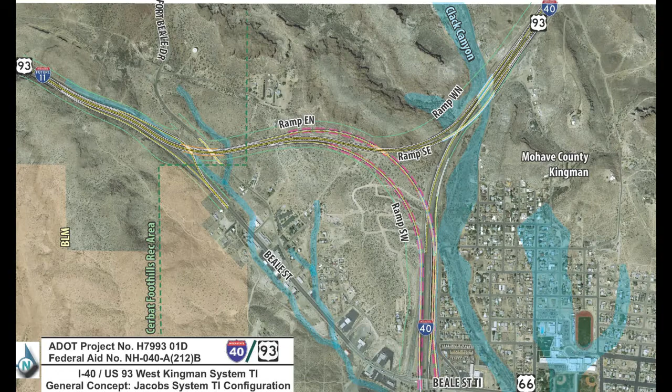The one thing that wasn't shown in the original design concept report is that these improvements weren't originally scheduled to go as far to the north as we are currently showing them. On the screen in front of you, it might be a little bit light, but we were initially going to basically stop the improvements north of Clack Canyon, actually just north of the White Cliffs bridges, and tie back into existing I-40.

We're now including our improvements to go all the way up to Stockton Hill. If you're familiar with how today it's 2 lanes in each direction from Stockton Hill to Beale Street, it'll be 3 lanes as we connect to the improvements, the ramps, and then going up to Stockton Hill. It'll be an auxiliary lane, so it'll drop as we approach the east side of Stockton Hill and merge right in with the off-ramp or the on-ramp. So as you get on and off those 2 respective ramps, it'll appear like you're just transitioning right onto the freeway as opposed to merging and getting into the other lanes.

So our improvements have extended to the north a little bit. If we didn't build those auxiliary lanes, we couldn't get the facility to function in the future traffic demands. As the area continues to grow, the volume of traffic would exceed the capacity of the interchange. So those are some of the changes that we were having to make. On the agenda, I put some issues that we're right now looking at in terms of where the design is being focused, what are some of the issues that we're considering with the improvements that are being done. The first one is the I-40 westbound and eastbound improvements. Well, talked about Stockton Hill.

The last point on there says the interchange capacity will reach a level of service D. In traffic speak, for those of you that don't do level of service, it just tries to identify how busy the roadway system will be. Level of service D is still an acceptable solution for how many cars are on it, but it's going to be comfortably busy. I guess that's the best way I would describe it. Not overwhelmed, but certainly within its capacity.

The next item that we show on the issues list is stockpile materials and earthwork balance. One of the things that we're going to be doing on this particular project is mining and giving the opportunity to use some of the materials that we're cutting through on the mountains as aggregate in the project. ADOT has done some exploration, and the very first hill that is immediately to the southwest of Clack Canyon is particularly hard rock, and that material will work for our aggregates. So we're actually going to be saving some money by processing that material and that cut from the rest of our project.

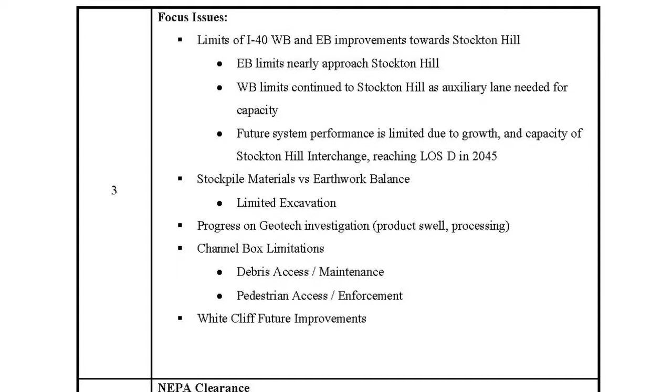Oops, I guess I got my slides out of order. Well, let me just change one thing back. We talked about the material source. I didn't show a slide for it.

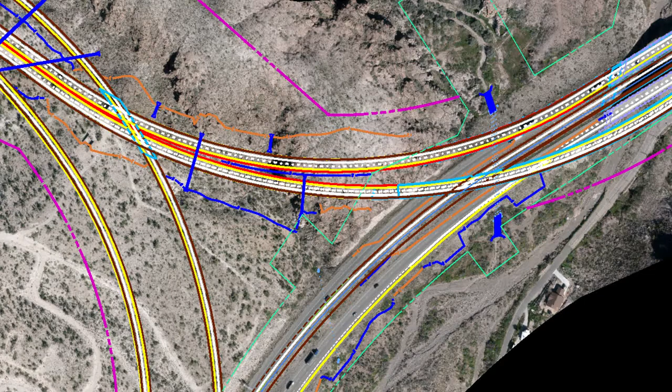Up on the screen, we are showing you a picture of the hill that is immediately to the southwest of Clack Canyon. That's the material I was just talking about, where we're trying to mine some of that material. We had a three-dimensional picture that kind of just shows how we're cutting into the sides of the slope. So if you can kind of use your 3D hat. Everyone right now is used to seeing fantastic animations.

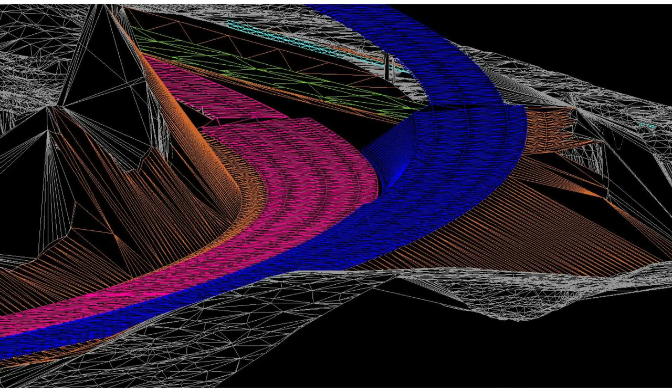This is not a fantastic animation, but in engineering speak, it shows how we're going to cut into the hill and how we're going to use some of that material. The good news for us is it's not going to be a huge, large face like some of the other cuts on I-40. We're looking in the 40 to 50 foot range in terms of the cuts, and it blends in well, fitting in with the two alignments that we have.

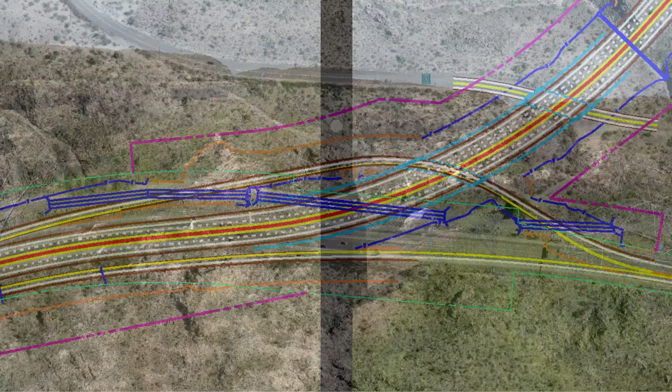So we have some erosion to take care of as far as our improvements are concerned. Where we're building the connection between US 93 and these improvements happens to coincide with where some of this erosion is occurring. So we're in the vicinity of fixing it. And so what we had proposed to build is, as we do our improvements over the drainage channel, our intent was to put in some large box culverts and simply convey the drainage under the roadway.

The slide that's on the screen right now shows the interchange improvements; the dark blue lines are showing some parallel features. That's a couple of series of box culverts that are located in the channel itself. No big difference from any other highway project. They all include box culverts and they all have drainage that has to cross the roadway. The only reason we're bringing this up on this particular project as a question is we're really close to Kingman. We're really close to potential pedestrians.

And anytime we build a shade structure, that's what some people consider a box culvert to be, then this might be a potential place of respite from the heat and the winds that occasionally occur here in Kingman. I don't mean to make light of the fact that there could be a problem with conflicts as to how we build this. However, we have to convey the drainage in that channel and get through the interchange. And so right now, the most routine and the most direct approach is to build the box culvert.

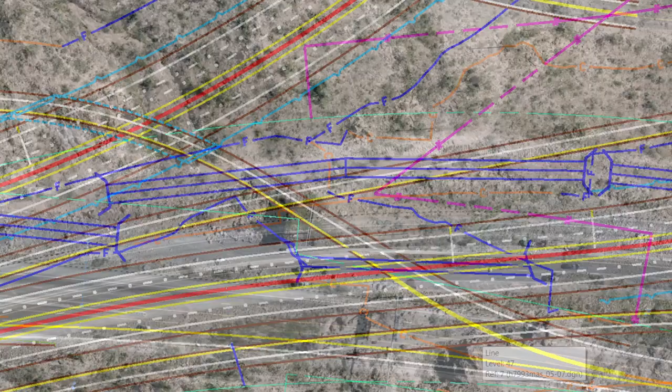One of the ideas that was brought up at downtown, instead of putting in the boxes, why don't we consider relocating the entire channel and building it, if you will, to the north of the ramp in between Fort Beale Road and our system ramp. The only problem with doing something like that is there's an awful lot of rock and an awful lot of mountain in between there, and that's why the channel is where it is today. But that is something that we will look at doing just to see what the cost comparisons are from trying to find another way to build that channel.

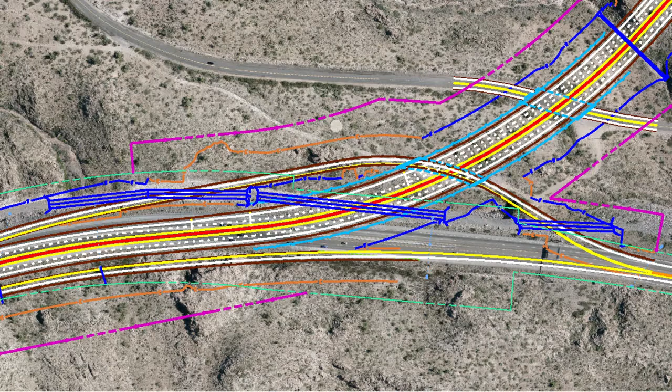If we were in a situation where that material was great rock and we could use it for our material sources, that would be an added benefit. Unfortunately, our understanding is these are volcanic tuffs, and while it looks like rock, it acts like rock, it doesn't hold up like rock for our material sources, so we can't use it in the roadway other than just embankment. So those are some challenges that we were experiencing associated with that.

When we came during the field review, also earlier in February, March, we're talking about our improvements are now being extended almost all the way up to Stockton Hill. And so we're crossing over where the White Cliff bridges are today. So here's a picture of the two bridges that are over White Cliff Road. We had done some chatting with the cities and the counties on this particular road, and we're sharing what we've heard from you, but we're asking that you still consider the possibilities of a change here. We're not considering moving the road, we're not considering taking the road away, but right now there are two very long bridge structures that cross over White Cliffs Road.

And one of the possibilities we had was to take those bridges out when we widened them and put a large precast box, or excuse me, arch in its place. Right now that's not part of our improvements, but that would be a cost savings approach for us, and that we may want to reconsider in the future if we have to do a cost comparison to see, improving the improvements to Stockton Hill, how can we find ways to fund it?

It may be that the city and the county has other plans for the road, and so we're going to ask that you continue to keep us in the loop as to what you see as improvements going on to this particular road, so we can make certain that we can accommodate those improvements and ensure that what you have in the future is going to meet your needs. Again, it's not something we're changing. I just wanted to bring it to your attention on things that we're considering and reviewing. So those are where our changes are and how they're fitting into the roadway prism.

As we fit to the rest of the roadway corridor, in your packet and on the screens, we put a couple of three-dimensional models. Again, this is if you were looking at the roadway almost directly over us right now and looking towards the north end of the project, not at Stockton Hill, but at Clack Canyon. That's the cut on the face that we're talking about just to the southwest of Clack Canyon, and as it proceeds to the west, how we're fitting into the landform.

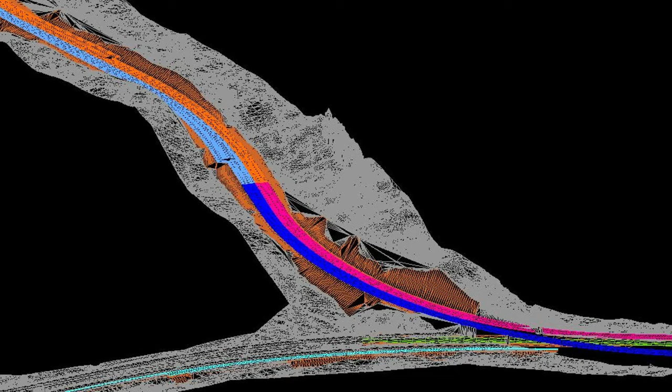If you were to look over Clack Canyon and looking over at US 93, this is kind of what it looks like if we were heading in the other direction. All of our improvements on 93 are basically being made to the south. What that means is we're basically holding the edge of pavement on US 93 and widening everything into the cut that's to the south of existing 93.

Our whole goal is to minimize the amount of impacts to traffic while we're doing the construction. This way we believe that we can maintain our traffic with the least amount of impacts, and also the least amount of impacts ultimately to that wash that I was showing you in the earlier slides, keeping the wash open.

The concept that we have does not include a formal interchange per se like a half diamond, but we have slip ramps that take you on and off from Beale Street and transition to US 93. If you're not colorblind and you see colors the way that I do, there's a purple strip on this screen image, and that short little wiggle in the middle of it, that would be the on-ramp that would be coming on from Beale Street. You would cross underneath US 93 and tie back into 93 to head north towards Las Vegas.

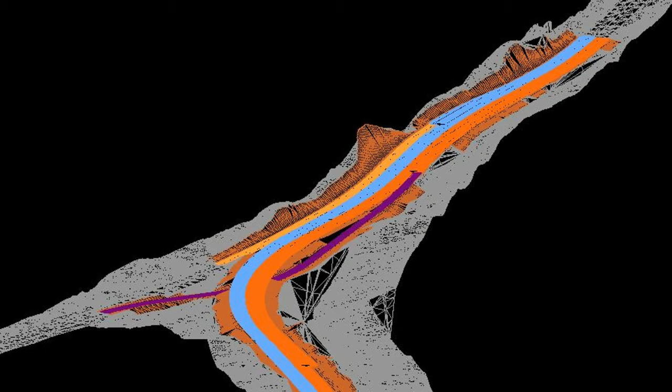The improvements that we're showing in terms of the cuts, yeah, they're certainly going to be added to the cuts, but they're not going to look too dissimilar to what you see today. So the end results are going to be a little bit comparable. So that's how the improvements will be fitting. That's how our alignments are looking.

Some of you folks here are with agencies that are waiting for our environmental document. We have defined now what the footprint of the improvements is going to be with the horizontal and vertical alignments and the catch points. And so with the environmental clearance, we are now going to be working with our environmental team to start doing the technical reports for the biological, cultural, air, noise, and waters of the U.S. as those documents start to be developed and completed.

Those documents were all created in 2013-14 for the earlier environmental efforts that were completed. It's just that since that time, these documents have to be updated to ensure that all of the criteria are still being met. We've also expanded our project towards Stockton Hill. That being said, all of the improvements north of where we're extending it are within the existing ADOT right-of-way. So we are hopeful that that won't change or challenge the environmental documents too greatly.

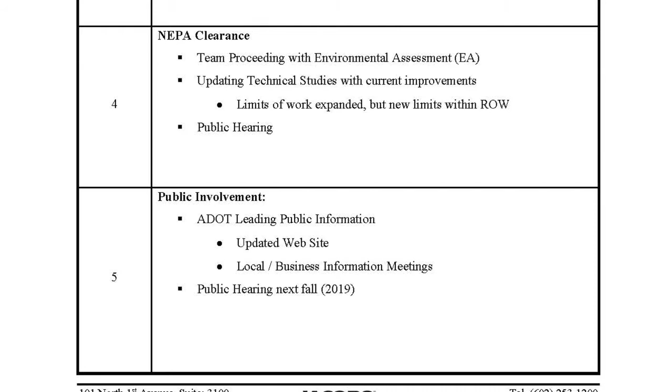With respect to the environmental clearance, our goal is to try and complete those clearances such that we can have a public hearing this coming fall. That's still the schedule and the goals that we're going through. We just don't know exactly when that will be; it likely will be around the October, November timeframe. But that's when we'll be sharing these improvements formally with the public and getting feedback on these changes.

Our hope is that they're not too considerably different than the previous concepts. It's just how one operates the vehicles that's changed slightly. And so we think that this will basically meet everyone's needs. From a public involvement standpoint, ADOT has a website for US 93.

As we get these images completed, we'll be uploading those to the ADOT website so that the public can see them in advance of the meeting and try and keep them involved. Then one other thing is Alvin is going to be scheduling some meetings with some of the local business folks, and especially the businesses along the Beale Street corridor. Make certain that we're addressing some of their concerns in terms of the traffic and how things are going to

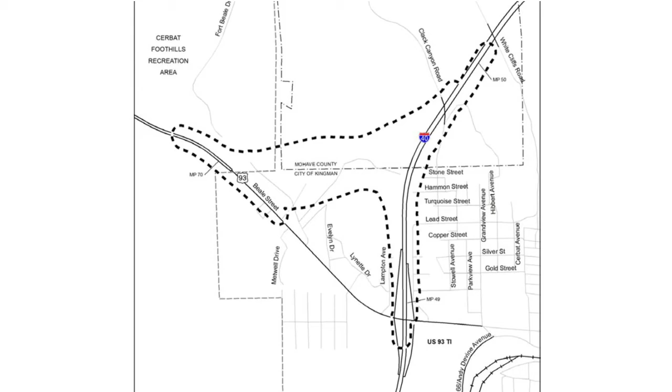So in the attachment that you have to the agenda, there was a deliverables matrix. It shows how we're proceeding in terms of documents that we have to create. Our big emphasis right now is the change of access report that we're submitting to Federal Highways. A draft is being submitted later this week to ADOT so that they can review the information. Once that document clears ADOT, then it'll go to Federal Highways here in Arizona. And then once we get their comments incorporated, it goes to Washington, D.C.

The whole intent is to make certain that as we go through the environmental process, we don't want to have something that's approved by the community but doesn't meet muster with respect to the interstate system and all the other reviews that we still have to receive. And so it's a dance, but so far the schedule seems to be working to allow us to put the dance together and move forward. So those are the deliverables you see. That kind of gives you an update as to where the project is.

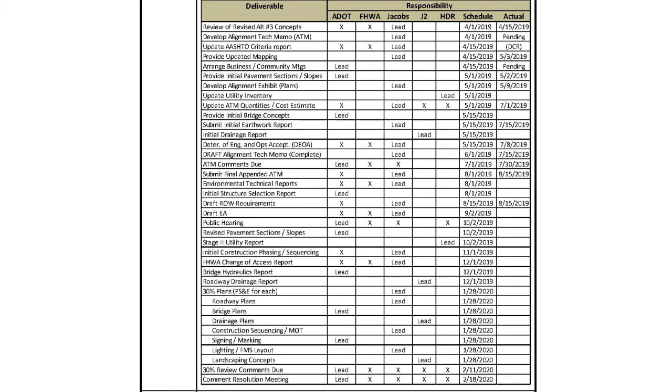Our focus right now on the design side, there's some details that we're having to work out in terms of the size of the bridges, the size of the openings of the local streets. We'll have more information on that on future updates. But from an agency perspective, we wanted to share with you in particular that everything that we've proposed in the past at the kickoff meeting, we are incorporating. And so that's why we wanted to share that with you today. If there's any questions from those in the crowd here today, we might be able to answer some, depending on what the question would be.

Everyone's quiet. Well, then there's a better thing for me to do, and that is the project sponsor for your local district is also here. I'm going to let Alvin speak a little bit about the improvements to make certain that you don't have any questions for Alvin.

Well, thank you. I don't really have a whole lot else to add, but I think we got some good solutions. I like the revisions that we're working on, and I think it's going to make it a better project for us. And again, like Berwin mentioned, once we get far enough along, we will have some business stakeholder meetings where we can make sure everybody understands what we're doing and get all of their concerns addressed as well. And so that's really all I got.